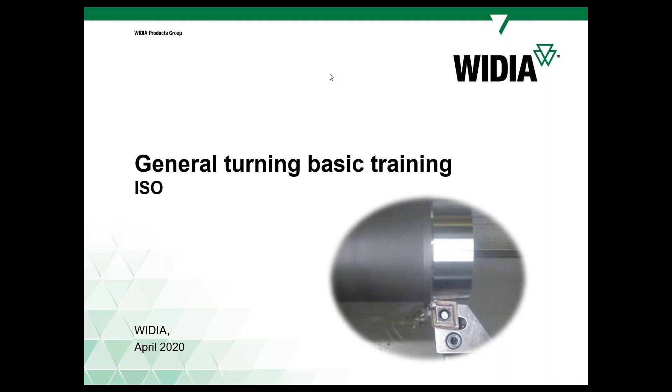Hello, dear metalworking colleagues. Let's talk together about turning applications. We have a slightly big presentation with videos about our assortment, and you might know that we have a slightly wide assortment for turning operations, for general turning, for cutting off, for parting and grooving, and also for threading, for everything that is generally needed. You can also find this information in our catalogs.

But today we will talk about this application, how it's done, and it's a more or less basic training, also with some tips. We will talk about definitions, about geometries, and not only today but also tomorrow. Today maybe we'll cover 50%, and the next day we will talk about cutting tool materials, workpiece materials, how to avoid wear, and so on - different additional topics related to turning tools.

So today we will talk about the concept of turning, comparison of turning and milling in implementation, and also about geometrical components of turning cutters, like cutting angles, and also related to inserts, cutting inserts, and about cutting forces. In the end, we will talk about cutting data and cutting parameters which influence the cutting process, or also the effectiveness of the cutting process.

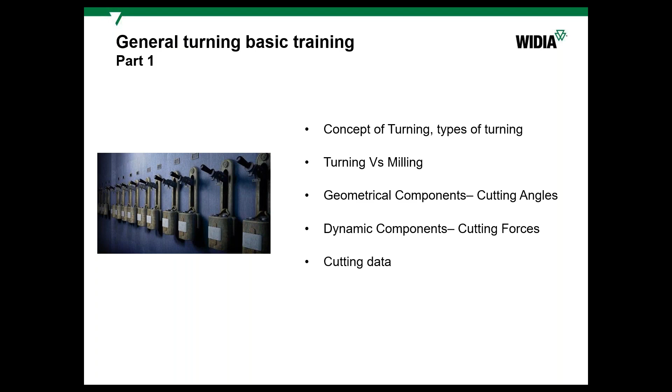So first, which types of turning operations can you face? They can be different. Today and tomorrow we'll talk about general turning, but a lot of things relate to other types of turning, like parting and grooving, threading, heavy duty turning, and other close-to-turning operations. Also, there can be different external and internal operations, depending on which side you want to machine the component from - outside or inside. So it can be external or internal general turning, external or internal parting and grooving, and threading also.

As for general turning, it can be facing - you'll see on the next slide, but let me briefly show it now. Facing is when you need to machine the face of the operation. Also longitudinal turning, which is just a linear turning operation, and also copying, when we need to machine a complex shape from a cylindrical workpiece. Also, there can be a trochoidal operation, when we use, for example, a round shape of insert and machine a sort of groove by trochoidal trajectory.

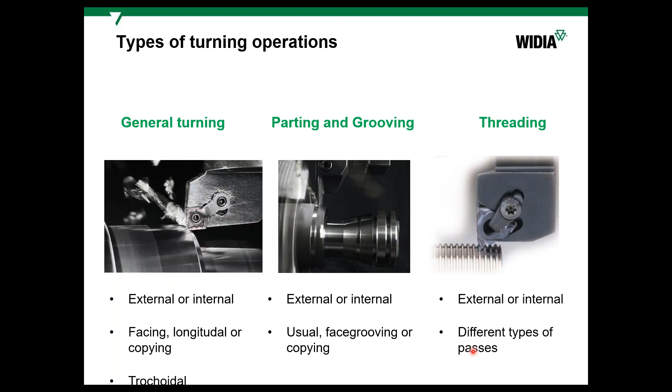So what is a turning process? Basically, it's a shaping process by metal cutting, where the workpiece, a cylindrical workpiece, is rotated by a machine tool or lathe. This operation was invented many years ago, and more or less modern versions are known.

They were developed in the beginning of the 19th century in Great Britain. Now we have more modern machines, where the workpiece is clamped in a chuck, the spindle is rotated, and the cutting tool comes up to the edge of the workpiece and moves in the direction of feed, depending on which side we need to machine: face, cylindrical, back, and so on.

So feed motion is done by the tool, which is clamped here - you can see an elementary holder. Cutting speed and the main cutting motion are generated by the spindle's rotation. So it's done like it will be shown now here.

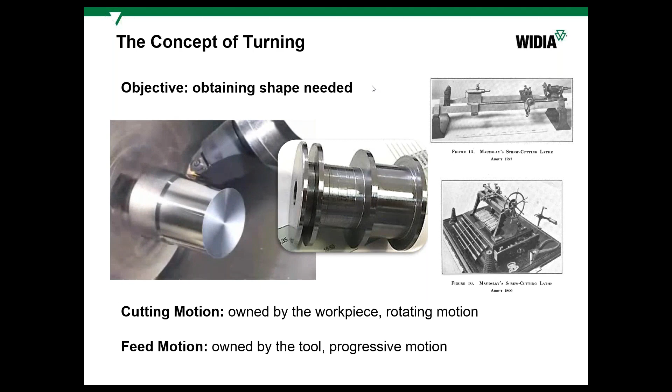There are also other types of operations for sure: tapping, milling, drilling, and so on. But the most popular ones are turning and milling.

What's the comparison? A milling cutter, in general, is like a turning cutter but with more teeth - not only more teeth, but it consists of many turning cutters, so many cutting edges. In milling, the main cutting motion is done by the milling cutter, the tool itself, while the workpiece, usually a prismatic or cubic shape, moves.

They're moving by the table of the milling machine, for example.

If we talk about turning, it can be continuous or interrupted, but usually, as you saw in the previous slide, the cutting edge is constantly in contact with the workpiece material, steel or cast iron or whatever. So in most cases, the cut is continuous - it's constantly cutting deep inside this material, this steel.

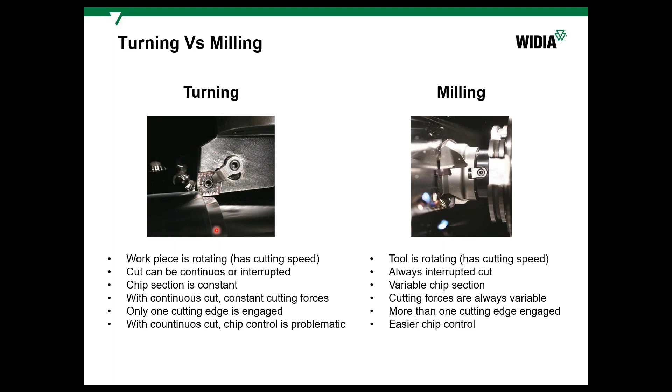It becomes an issue when we talk about deep slotting or pocketing, but not as often as in turning, where every time we need to think about chip control. If the chip is not divided and is not small, if it's long, it will rotate on the workpiece and can damage the tool and the surface, and you will get a non-ideal surface finish in the end, and reduced tool life.

So let's talk about cutting angles. For sure, you can open some catalogs or books, maybe you already studied this in university or college, but I'll just briefly explain it in a very easy way.

This is a turning holder. It consists of the holder itself, made of steel, which can be different shapes - prismatic or modular for external turning, or modular or cylindrical for internal turning operations. It also contains the cutting unit - the cutting insert basically - which does the cutting. The holder is needed to input this tool into the machine tool.

The turning holder can be different sizes, different cross sections, depending on the size of the workpiece we need to machine and the size of the machine tool. Also, it's connected to other things.

It has inserts on this cutter, or cutter in general. It has different cutting edges, main cutting edge and secondary cutting edge. Also, it has a rake face and clearance face.

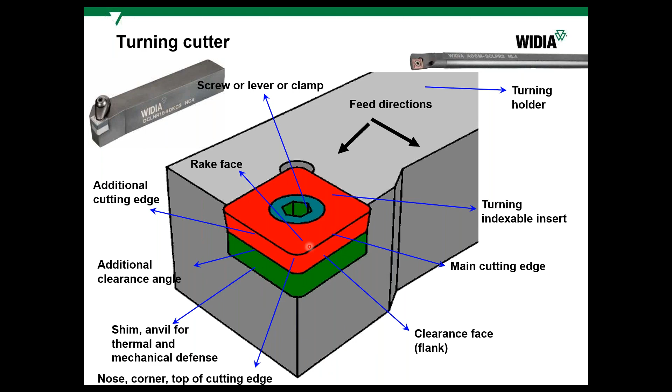As for holders, they can be different shapes, different sizes, from I don't know, 10 by 10 millimeters to 60 by 60 millimeters, if we talk about prismatic shape. They can also be modular, like KM, PSC, and so on. Cutting inserts can be different: one-sided, double-sided, smaller size and huge size for heavy-duty operations, for tube machining, and so on, with different shapes. They can be rhombic, sharp rhombic, round, square-shaped, and so on.

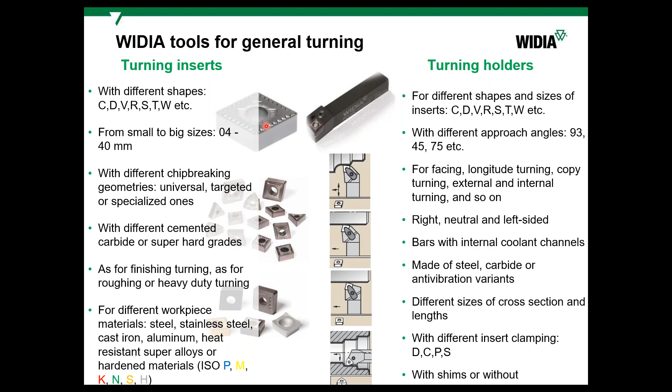These angles make the cutting edge itself sharp. Also, if they are bigger, they avoid having extra friction between the workpiece material - the clearance angle is responsible for that - and the cutting tool edge. So for sure, if we have bigger angles, it works lighter. It cuts very nicely, especially aluminum and soft steels.

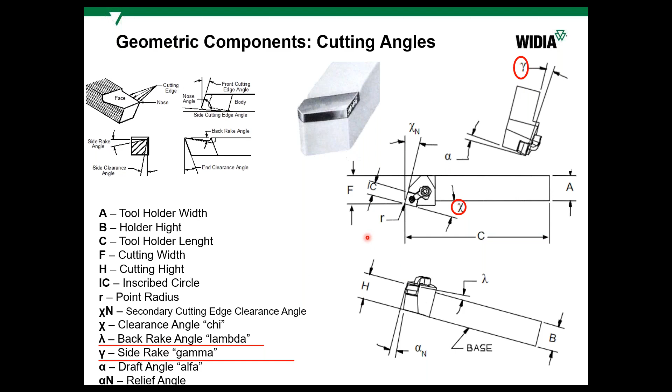If we look at the turning holder, the turning cutter from the top, in contact with the workpiece material, you can find two angles. I put here the abbreviation kappa. It's a lead angle and also a secondary lead angle. Why am I talking about these angles?

Not in detail, but I'm pointing out their value here, because we can operate them when we use the turning cutter. We can change the turning cutter to another geometry, and we can manipulate the lead angles too. So it can be 90 degrees or 75 degrees. Also, I'm talking about EMEA and Asia standards.

In the US, it's measured differently. It's the same angle, but it's measured from the vertical position, from a perpendicular line to the axis and the line of the cutting edge. In Europe, it's measured from the axis of the workpiece to the cutting edge line. So that's the lead angle.

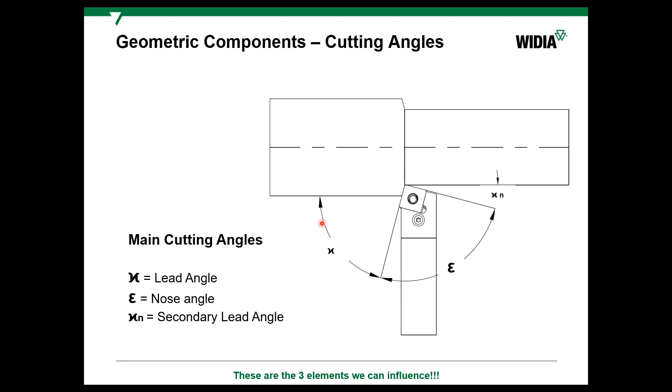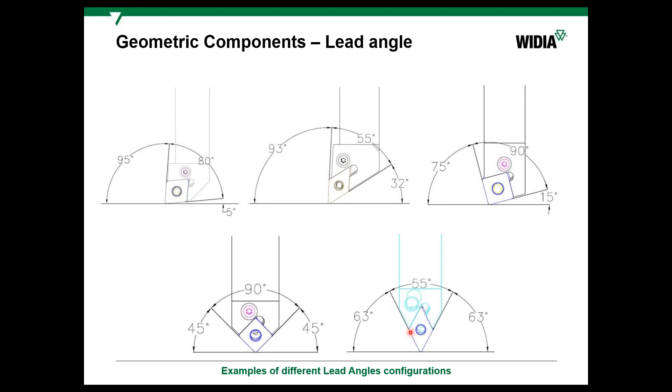They can be different, as I said, close to 90 degrees, close to 45 degrees. They can be 60 degrees and so on. So why is it important? First, it influences chip thickness.

When we talk about the cutting process, for example with the same geometry - meaning the same rake angle, clearance angle, chip breaking profile - we can have this on a rhombic insert and also on a square insert, for example, or a rhombic insert with this inclination in the holder. We can use the same feed, the same cutting data, but in the second variant, when the lead angle is 45 degrees, with the same feed, we will get a much smaller chip thickness.

So the load on the cutting edge will be smaller, but sometimes it can be critically smaller, and that's not desirable. It also influences chip control. Basically, when we get closer to 90 degrees, chip control is better. When we use the same chip breaker with a smaller lead angle, chip control suffers, so we sometimes need to increase feed to get optimal chip control.

We can also automatically increase the feed to get the same chip thickness, in order to put the cutting edge in the same conditions as in the laboratory, when this chip breaker for this insert was designed, to get maximum tool life and maximum results.

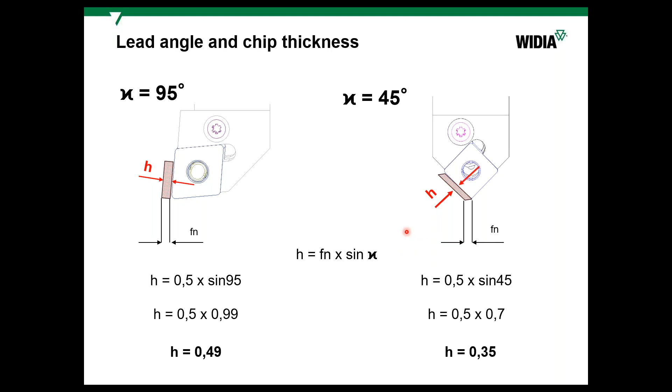In the catalog you will see it, you won't need to recalculate - it's already recalculated in the catalog tables and charts. Also, this lead angle, in other words, is called the approach angle. It influences the approach of the tool to the workpiece and its strength.

For example, when you approach the workpiece, the sharper corner will start to cut first. If it's an interrupted cut, not like here, but with some flats or severe skin, it will be critical and can lead to chipping and other types of wear we'll talk about tomorrow. So it's better to use tools with a smaller lead angle, so the corner doesn't start cutting first.

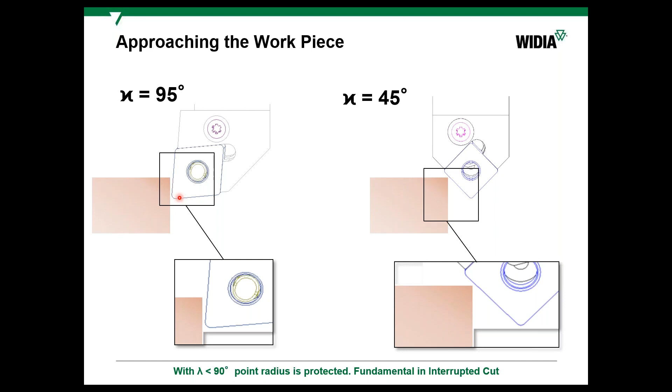The cutting edge, which usually is a little bit stronger - also in the chip breaking area, chip breakers are usually sharper at the nose and stronger along the cutting edge. The edge preparation has been increased a little bit there.

Also, the lead angle and secondary lead angle are important from a geometrical point of view. If you need to machine an interesting shape component, you need to understand, if you choose this tool with this geometry, it should be possible to pass through the whole way and not touch the workpiece material.

To achieve this, the secondary lead angle should be greater than the angle on the workpiece, on the component.

And it's also important to know, when you open the catalogs, we show in which direction this cutter with the insert can go. For example, here the cutter can go in horizontal direction, vertical, and also down, so it has clearance angles and rake angles almost everywhere.

But for example, here, you can see the arrow only pointing to the left, so it's possible to use it only for longitudinal turning, in the horizontal direction, not vertical. We didn't talk about this yet, but as a tool designer you need to understand that you also need to rotate, to incline the whole surface of the rake face, the bottom face in the holder - that's the inclination angle.

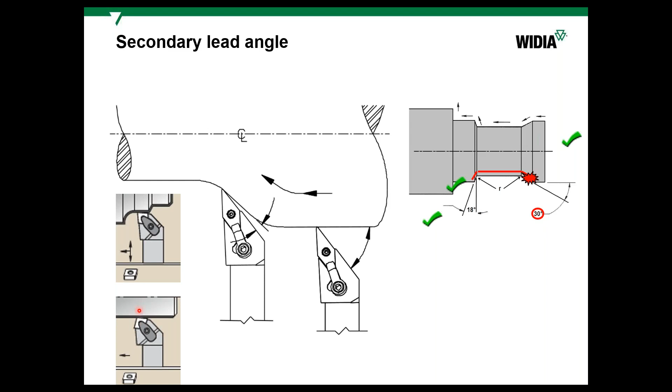And if we talk about inserts, they also have clearance angles and rake angles.

Also, if you open the catalogs, you can see the designation, the ISO designation system. It's international, more or less the same, and only in the United States it's different. So just sizes, the abbreviation is different, but different digits mean the same thing.

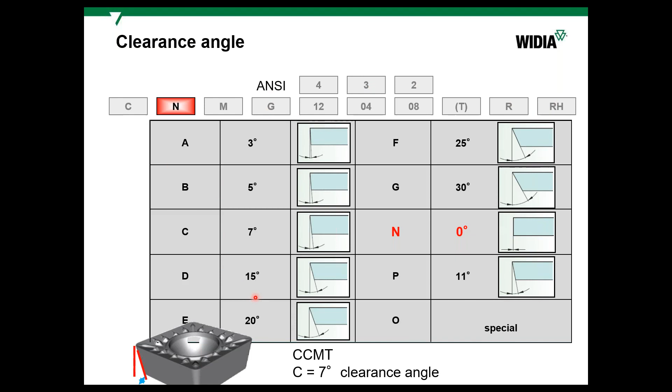So with imperial sizes, for example, length of cutting edge, or inscribed circle, also thickness, 4.76 if I remember well, but it's better to open the catalog to understand these dimensions: corner radius, edge honing, geometry name, double-sided or one-sided, and so on, and the shape for sure.

And the geometry of the tool is a combination of the geometry of the insert and the geometry of the holder. And for example, rake angle...

Why also? Because in the past, these inserts had a flat top, and we used special chip breakers which were clamped mechanically on top of the insert. We could change this chip breaker, bigger one or smaller one, depending on the depth of cut and feed we would use.

And this cutter with the flat geometry should also have cutting angles, and it has axial and radial rake angles and clearance angles.

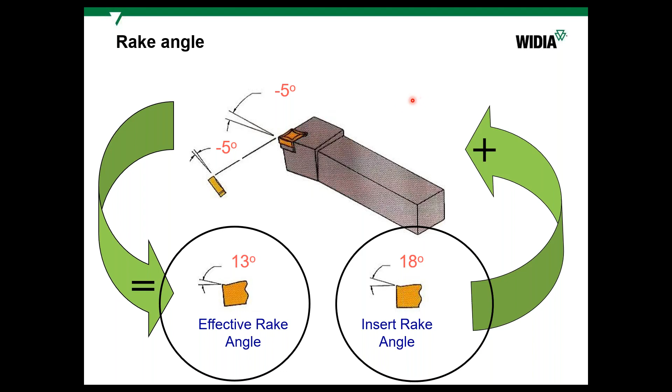So about these angles we talked a little bit. They're also called back rake or radial rake angle, and side rake, depending on from which side we look at the cross section of the cutting edge.

Basically, if we have bigger rake angles, it's very good to use such tools for soft materials and for light cutting - for cutting small stock, to remove small stock from the workpiece.

And so-called negative geometry - why negative? Its rake angle is minus, so it's not positive. That's why it's called negative, because in the past, inserts were flat, and the orientation of the rake surface was negative - I mean, the angle was negative.

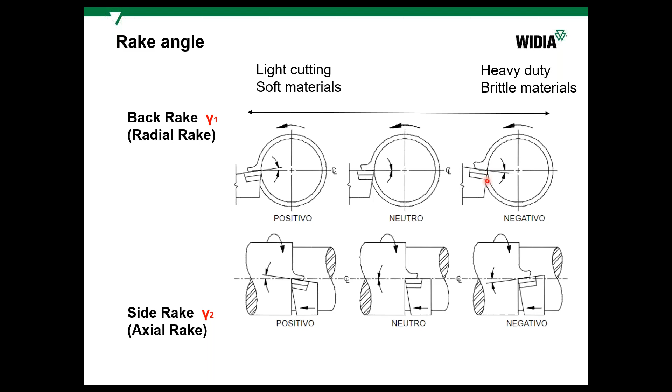That's why these inserts which I put here are called negative: usually if they have 90 degrees between the clearance surface and rake surface, you need to incline it somehow in order to have a clearance angle, because if you don't have clearance angle, there will be very big friction. So it should be inclined. That's why when we incline flat geometry, the rake angle goes from 0 to negative values.

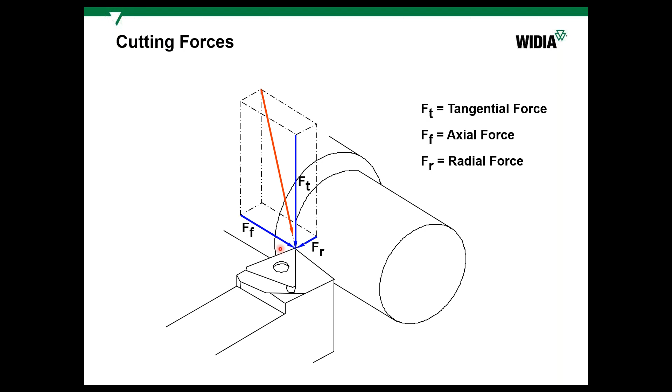Cutting forces: when we cut materials, there is a resulting cutting force, which is a combination of others - axial, radial, and tangential - and they influence the cutting process a lot. The main influence is the tangential cutting force, but the other cutting forces are also important.

How can we manage or influence the change of cutting forces, at least to change the main direction of cutting forces? For sure, with the lead angle again - so by changing geometry with different lead angles, we are changing the direction of the actual cutting force.

And I have a small question for you before I go to the next slide. Please take 1 minute, or maybe less, to vote for the right variant to this question.

What is the better choice for long shaft turning in your point of view? By long shaft turning, I mean a shaft or axle which has a diameter, with length about 10 times the diameter. You need to make external, longitudinal turning, decreasing the diameter with a tool with a 90-degree approach angle or lead angle, or a tool with 75 or 45 degrees, or a holder with a round insert. What type of lead angle, what type of holder with which lead angle, is the most correct in this case?

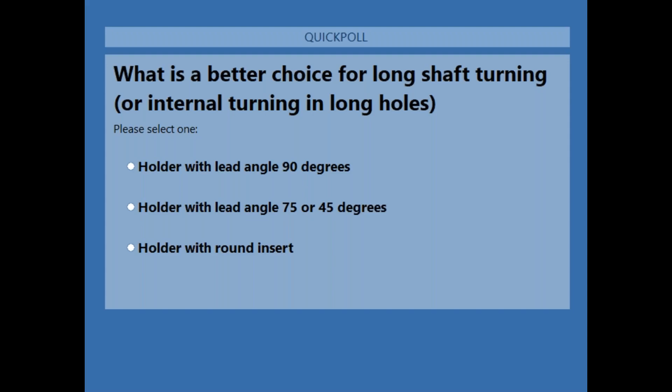Okay, thank you, I think we are ready to look at the results. So very nice results. More or less the same quantity voted for holder with a lead angle of 75 or 45 degrees, and also for 90 degrees, approximately a smaller but not that much smaller quantity of you voted for that. So let's talk about it a little bit.

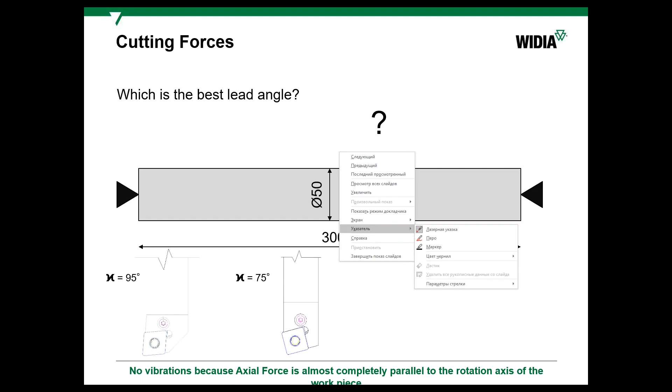Here it's a not rigid long shaft, which has some diameter and length. Here are two tools with 95 degrees approach angle, and approach angle can be 75 or 45 degrees. So usually, when you apply the first one, axial cutting force will always be perpendicular to the cutting edge line. One second, let me try to write it. So if you use it here, let's rotate it a little bit.

So there are different cutting forces. Here, one tangential is going, directed to the screen, and there are radial cutting forces. There are also cutting forces that are axial. So basically, axial cutting force goes perpendicular, and it's more or less good. For the cutter it's not that good, but the cutter is more or less rigid enough. It's not thin, it's slightly thick. So it's the normal direction for the cutting force.

But for the material, for the workpiece, it's not critical. I mean, here the radial cutting force is not that big.

But if you talk about 45 degrees, this combination will direct more force to the workpiece. If here it's not a problem, in the middle where the shaft is not rigid, it can bring additional vibrations. If this ratio is about 10 times, there will for sure be big vibrations if you apply this type of cutting tool.

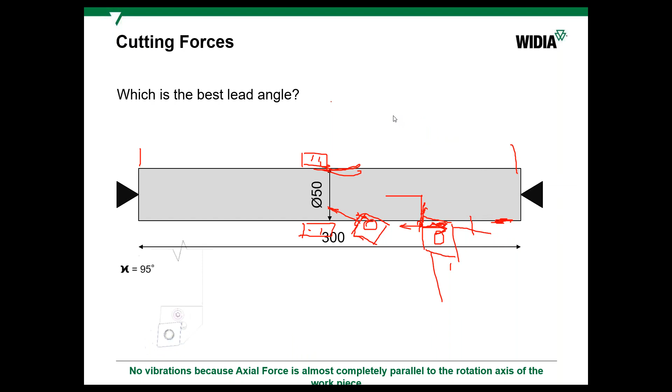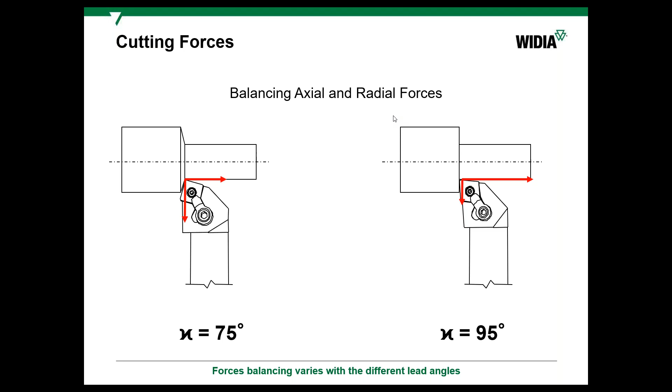So we need to balance the cutting forces using different combinations of inserts and holders. So think about lead angles, think about the component - is it thin, is it thick, is it rigid, and so on - and also about the tooling, I mean how it is clamped, both the workpiece and the tool.

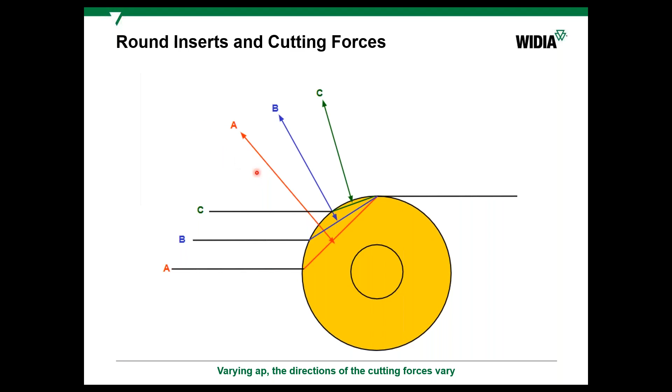So if you use round inserts, you will also face vibrations anyway, because at the maximal position with this AP max depth of cut, you will get about 45 degrees approach angle. It's not 90, so it's also slightly small, and the resulting cutting force will be directed to the workpiece again and will push it, generating vibrations.

The same can be said about the corner of any insert, not just round inserts. If you use it with a depth of cut smaller than the nose radius, you should also think about cutting forces - they will be directed more vertically than horizontally, and you can face micro vibrations and micro chipping, maybe even with light cutting.

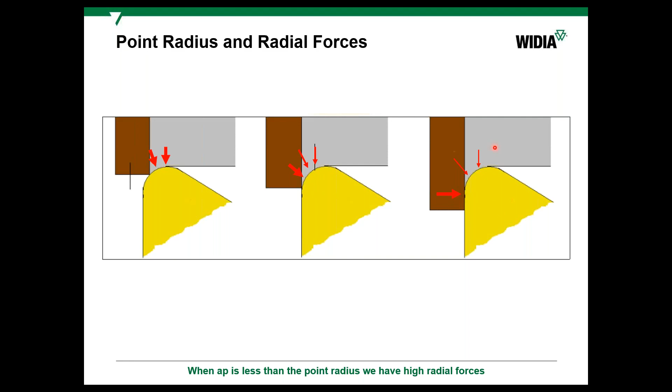That's why one of the recommendations for usage of turning tools is that AP, depth of cut per side, should be greater than the radius. So the third variant should be correct.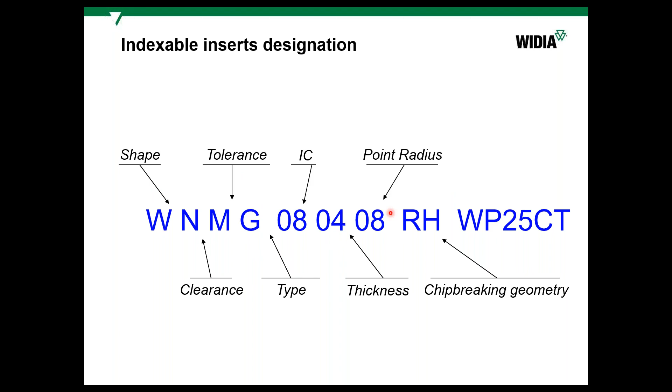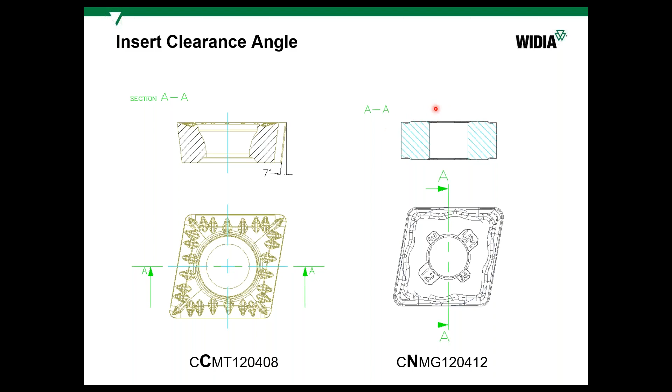So here, just reminding what influences what in the designation of inserts - it's very easy, and you can also look at it in the catalog. Inserts can be positive and negative. We talked about it a little bit, because inserts can be with clearance angle or without. If they are without, we need to incline them to get a negative rake angle on the tool. That's why they're called negative.

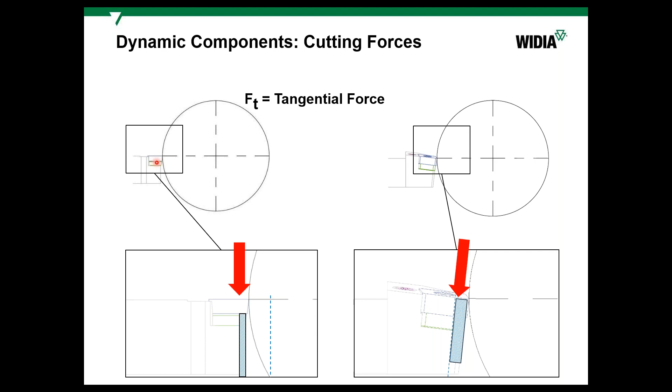So as you can see, positive inserts we should not incline. It's not necessary because it's geometrically shaped on the insert, and the rake angle can be 0, or if there's a normal chip breaker, it can be according to the rake angle on the insert, the same.

So let's talk about cutting data, and we will finish this webinar. I hope it's simple enough, maybe too simple for some of you, but we will also plan an advanced turning course, maybe a little bit later. So cutting data, which is related not only to turning but also to other metal cutting operations.

Cutting speed, velocity of cutting, so VC, and number of revolutions, diameter, feed per revolution, so F, feed, and revolutions. AP, depth of cut, Q, it's the chip volume, or in some literature you can see the short abbreviation MRR. Feed rate or speed of feed, so velocity of feed, VF. Chip thickness, we already talked about that, and spindle power and specific cutting force.

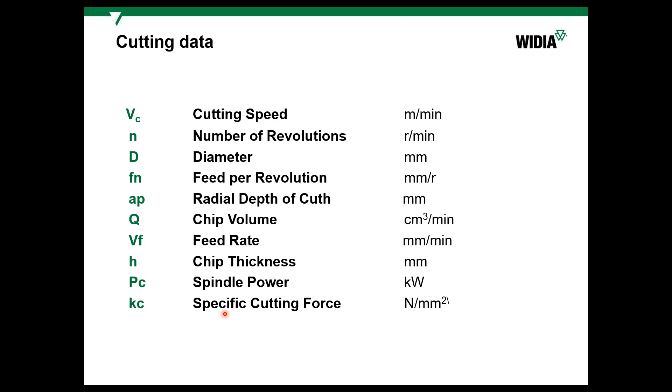Specific cutting force, it's a related coefficient to every material. We'll talk about it tomorrow. So cutting data: cutting speed, feed, and depth of cut.

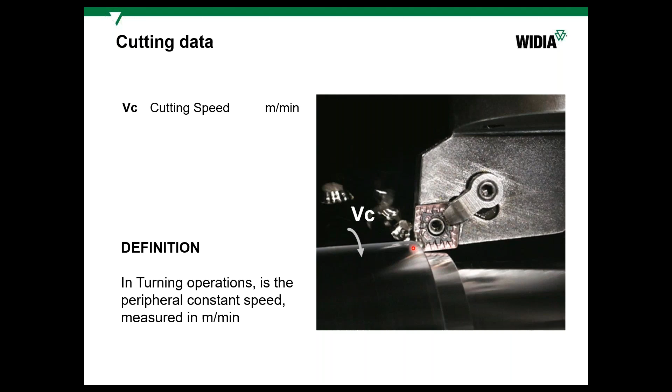Cutting speed in turning operations is a peripheral constant speed, or speed of the cutting edge on the diameter of the workpiece. So basically, to understand that, we need to look at the formula, and on the next slide, how it's been calculated also in addition. So cutting speed, it's a multiplication of pi by diameter by revolutions, number of revolutions per minute.

Basically, it's a peripheral speed or rotation speed of milling cutter or turning cutter. Also, you can recalculate back and calculate number of revolutions per minute, which you need to apply in the machine tool when you know the optimal cutting speed from the catalog of the cutting tool producer. So it's multiplying 1000 by cutting speed and dividing by pi and dividing by diameter.

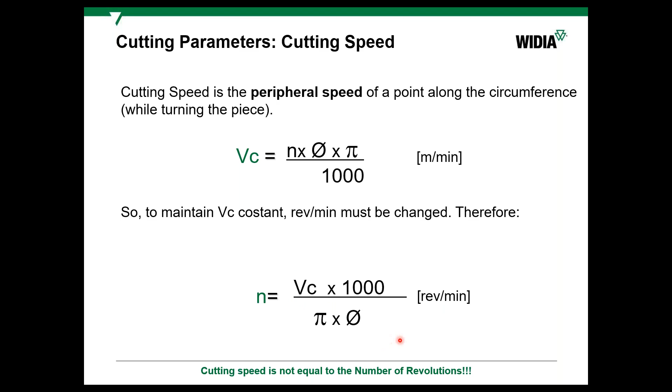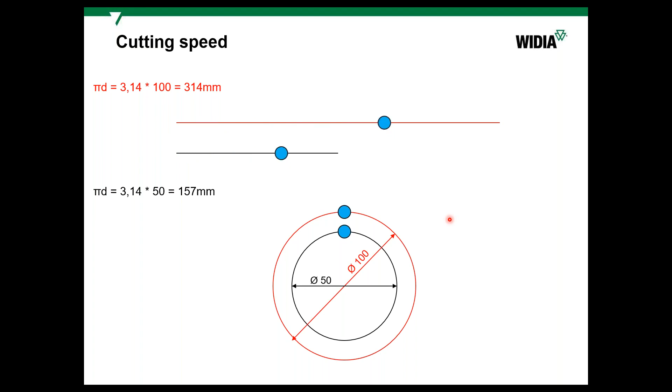So we need - and thanks God, in modern machine tool equipment, it's possible to maintain this in the CNC. So you can see here the length with, for example, different diameter, 100 and 50. It's almost 2 times smaller here than here. Here the difference can be just radially 25 millimeters, but here the difference is much bigger, and tool life correspondingly will be different.

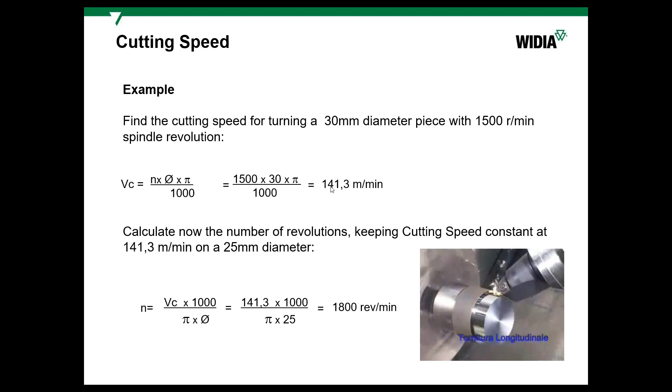Also, you can practice calculating it by yourself. Usually here, for example, for a facing operation, we need to compensate. You could hear it, maybe, I hope - when we go into the center, rotations are increased correspondingly to maintain the cutting speed given by the catalog. And here, compensation is not needed. So according to this diameter, if the catalog recommends this cutting speed value, we should just maintain it.

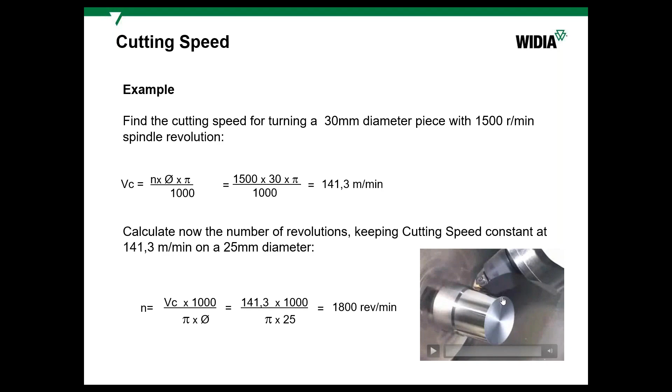Also, it's possible to maintain cutting speed depending on the diameter in CNC, in the G-codes. So usually it's G96, which allows you to maintain cutting speed at 200 meters per minute, within the range of these diameters. You can also put additional limitation of maximum and minimum revolutions, just if you know the capability of your machine tool. Or you can maintain a number of revolutions with the code G97.

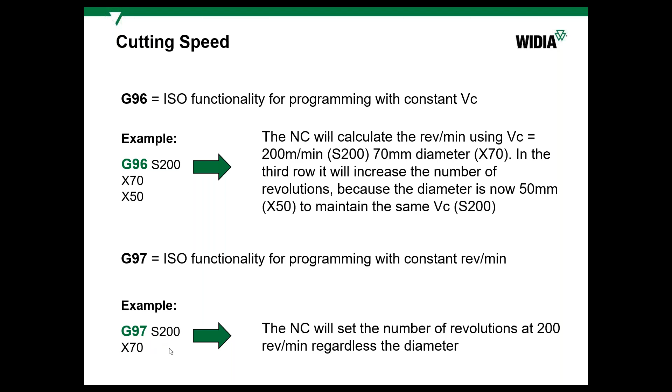Feed, it's a distance between 2 positions of the cutter during one rotation. So here it begins and here it finishes. One rotation passed, and you can see you will cut this length of the material, which equals FN. So FN is feed per revolution.

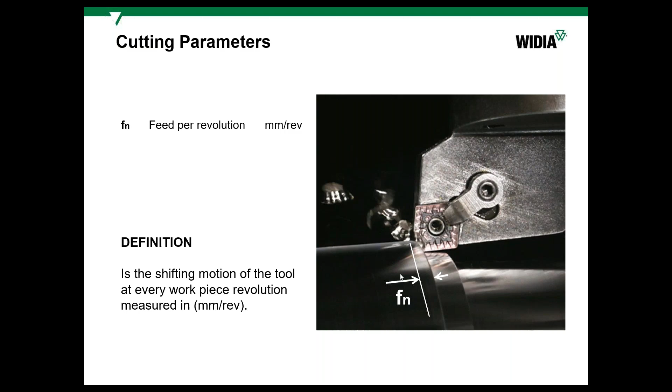It's also determines chip thickness. If you take a chip, you can measure it manually and understand - if you know approximately the approach angle - you can measure the thickness of the chip and understand which feed was used. And also you can measure the length, and understand which AP max was used.

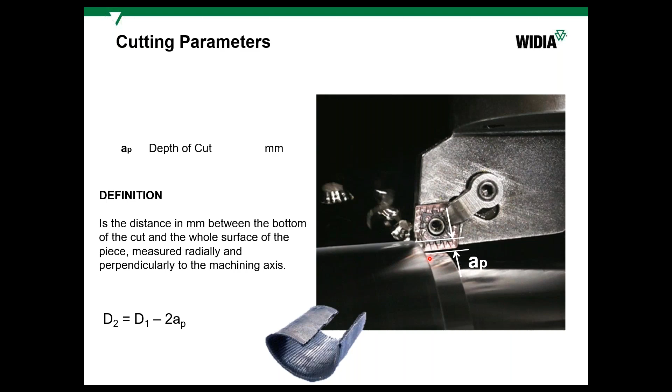And the AP, or depth of cut, it's a distance - basically it's the height of the stock being removed per one pass. So it can be calculated with workpiece diameter minus diameter of desired shape, divided by 2.

And feed speed, speed of feed, VF - it can be calculated by multiplying feed per revolution by number of revolutions. So it is a distance per minute which has been passed by the cutter in the direction of feed, direction of cut.

And we came now to productivity. It's Q, which is multiplying AP by FN by VC - so depth of cut by feed per revolution by cutting speed. We'll get cubic centimeters per minute, so it's the volume of the stock which is removed per 1 minute. So with the same tool life, the tool which has a greater Q value is better - it's more productive.

And usually it's like a speed, you can calculate the time for component, divide length by VF. You can calculate the time here also. I had not shown this elementary formula, but it's obvious.

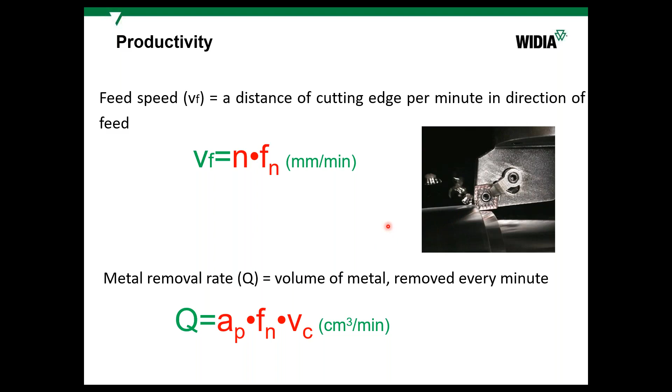Also, choosing the tool, we can influence the roughness, the surface finish. There are different formulas, but I showed a very simple one here. The formula maybe not that simple, but this chart is more or less understandable. It depends on the corner radius and the feed per revolution.

For example, here the next position of this cutter in one revolution will be here, and this height of the metal here is not even. The height will be approximately equal to the roughness, to the quality of the surface we get as a result. So depending on the corner radius and the feed, you can find that increasing the feed, we will get a rougher surface, not so brilliant.

But if you use the same shape of insert with a greater radius, not for example 0.4 but 1.6, with the same feed, this height will be smaller. So basically, if you increase the radius, roughness will be better.

But at the same time, you should remember what was said several slides ago: greater radius means a greater part of the cutting force directed to the workpiece. So with a bigger radius, there will be more affinity to get vibrations.

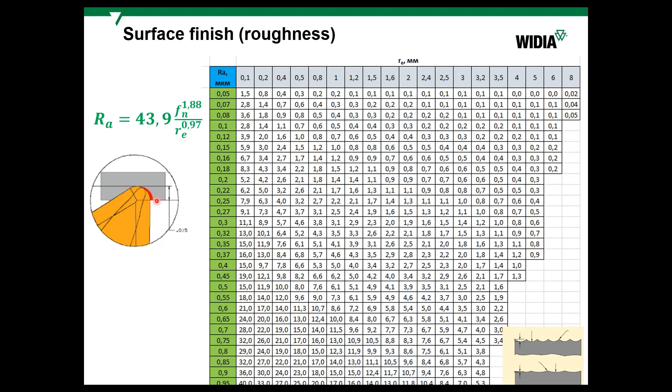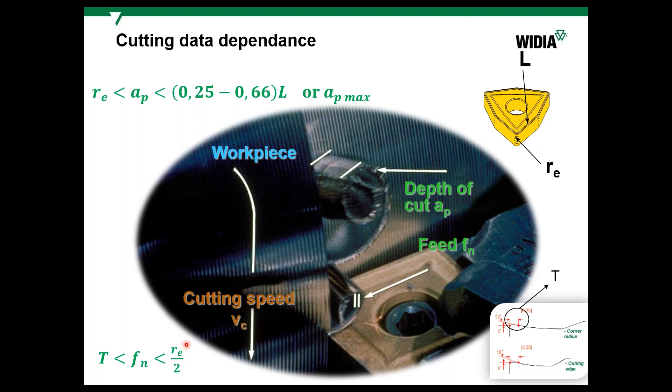It is because of this: if we get a very big feed, maybe it's good for the cutting edge, I mean it might be very strong with small rake angles, which is good. But if we have a feed greater than this value, the roughness will be very big. That's why this recommendation has been put here.

Also, according to this recommendation, if you have a depth of cut smaller than the corner radius, you will get not ideal chip breaking, because the chip breaker is designed better for the main cutting edge, not the corner.

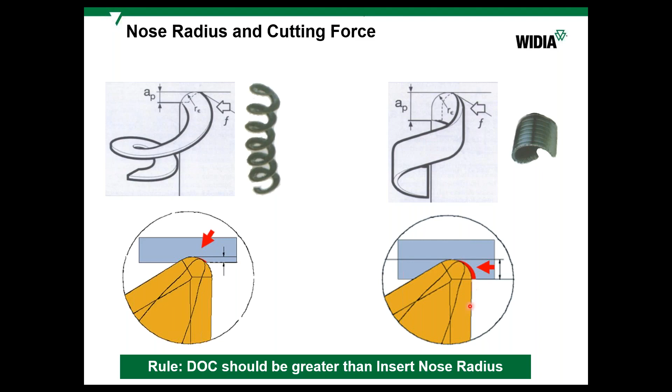For power, it's better to use a power calculator in our electronic catalog, which we call Novo. It has inside a database of specific cutting forces for every group of materials, steel, P1, P2, and so on, with coefficients of hardness and so on. It calculates the power a tool needs to be provided by the machine tool, finally, but very approximately.

If you don't have any electronics with you, I hope there will not be such a situation, it can be calculated slightly more easily: by dividing the cutting data by the coefficient 12 for stainless steel, 20 for steel, 25 for cast iron, and about 100 for aluminium. You'll get the kilowatts needed to be provided by the machine tool.

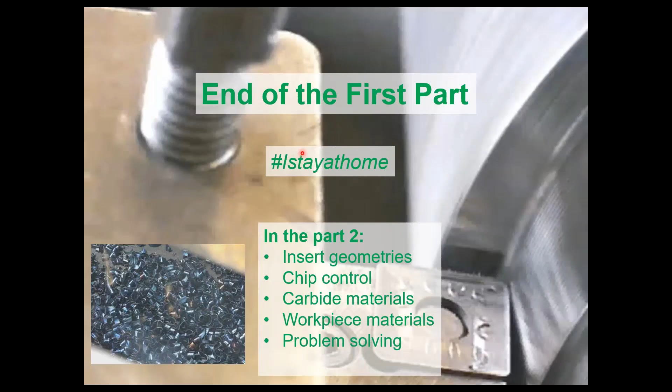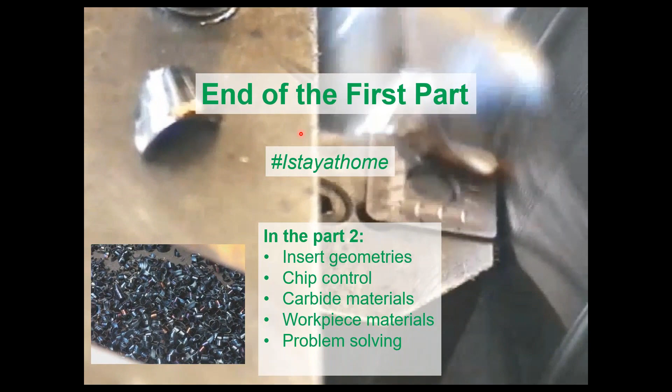So here, shortly, we finish the first part. Tomorrow we will continue with the second one, when we will touch on insert geometries, chip control, chip breakers, carbide materials, workpiece materials, problem-solving, types of wear, and how to avoid the wear we don't want.

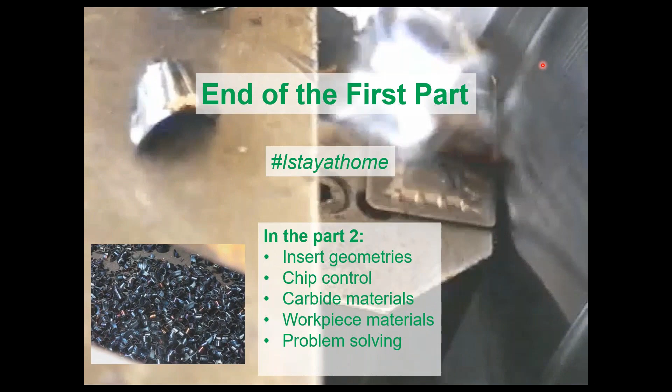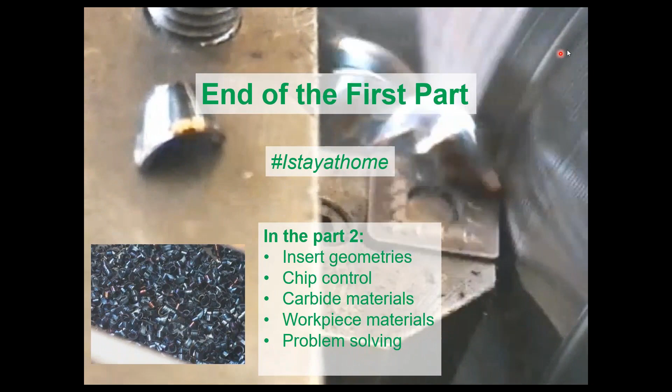Okay, fast. So please specify the parameters to be considered in turning of aluminum LM25.

Sorry, you were muted. So I just asked what parameter is interesting to know: cutting angles or cutting data? If cutting data, it's easy. The feed, depending on insert and insert size, can be around 0.2, for example 0.25, or for finishing 0.1 per revolution, and speed can be from 300 to 800 meters per minute, since aluminium can be cut very easily. But this grade of aluminium I'm not familiar with, maybe it's a special grade with a lot of silicon inside. I need to check the grade and get back to you by email, a little bit later.

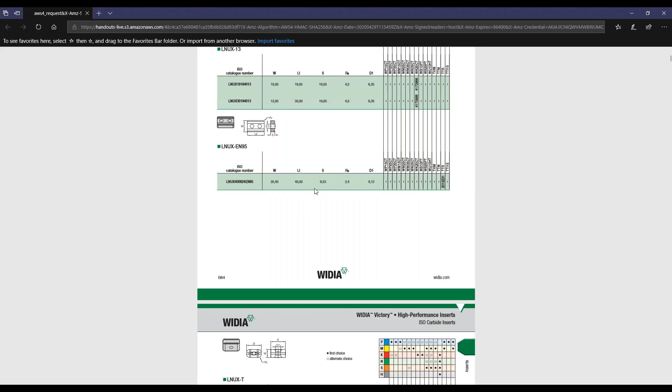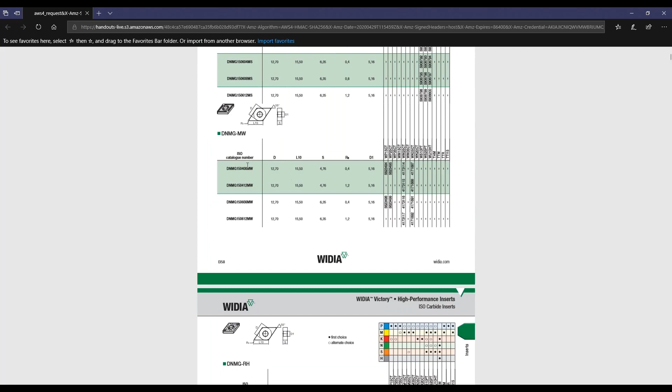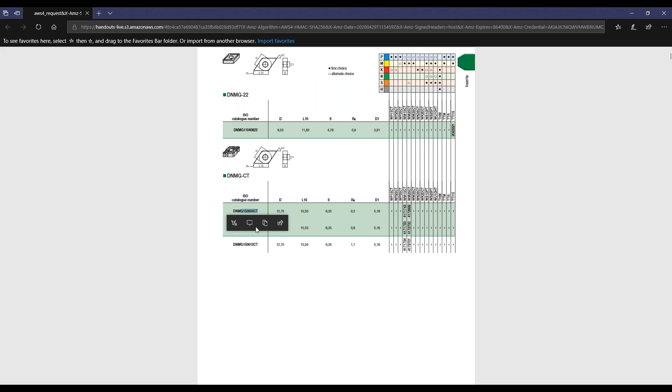I'll share the screen with our catalog now. So basically these are our insert sizes and shapes with different geometry. For example, DNMG inserts with a wiper cutting edge, and we have CT inserts. Let me try to magnify this. It's a very open cutting edge profile and chip breaker profile here. This insert can be used for back turning and for facing operations, where you need to machine a vertical shape without going from outside to inside the workpiece. It's possible to go down from here, and this additional chip breaker shapes very good chip, so it's not long. It's more or less the same technology which WIDIA introduced about 20 years ago.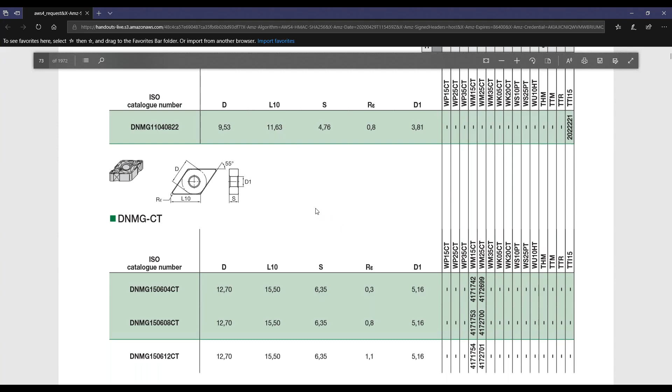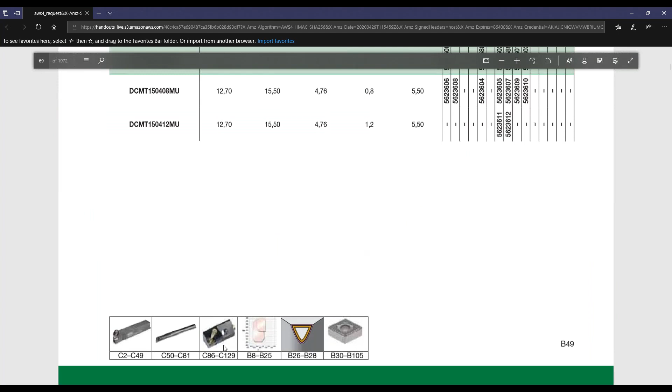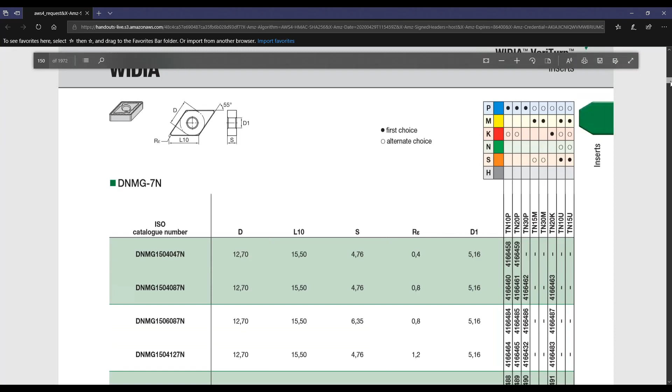Here's our catalog, the system is very similar. Here, for example, you can see on which pages there are holders, different holders, cartridges, cutting data, information about chip breakers, about grades, inserts, and also holders. Holders can be different, one second.

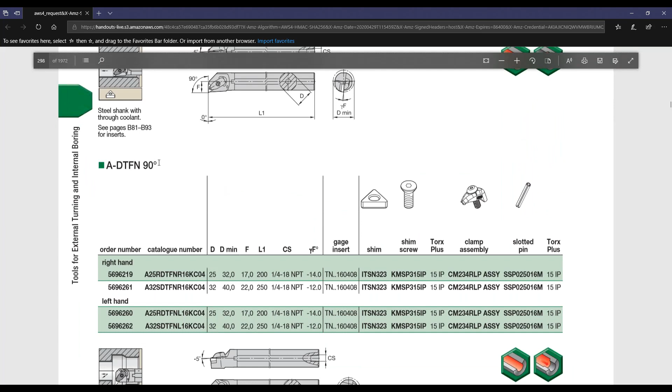Here's holders for internal turning with a 90-degree lead angle. Also the additional angles are shown - I mean the rake angles, axial and radial. It's in addition, for sure. Sometimes it helps, but it's better to look at the arrow to see which direction it can cut - the cutting holder with the insert.

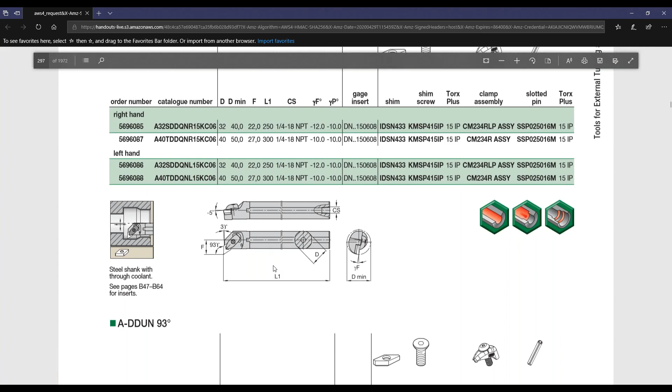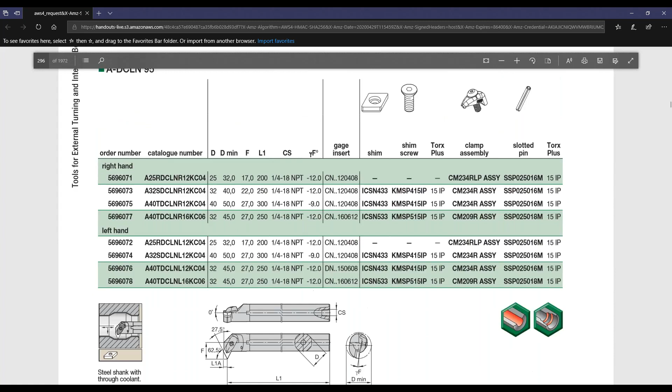And here the spare parts are also shown, and for which type of applications they can be used. Designation of holders and inserts is also in the insert chapter of this book. So if you have more questions...

How do you calculate the power and feed with respect to material hardness?

It's better to use our electronic catalog. I will try to open it now, because there is a place where we put a hardness, when we are choosing the workpiece material.

In this simple formula I showed earlier, it's hard to do exactly, so it's just plus minus 25% tolerance - a very easy to use formula. Basically, you need to decrease the cutting speed according to the difference from the average cutting hardness of steel.

For example, average is about 220 Brinell, and the hardness you have is, say, 350. So divide 350 by 220, and multiply this coefficient.

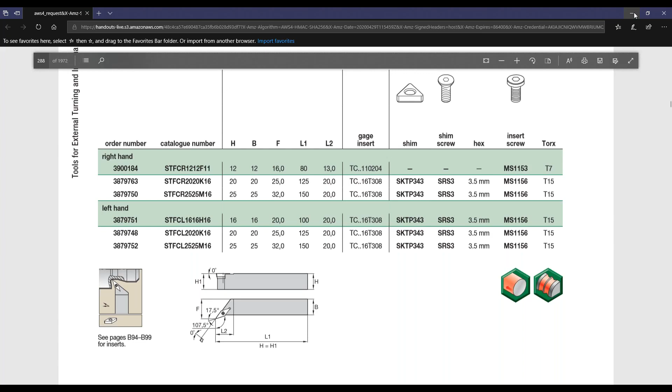One second, I will show the presentation again. Multiply this coefficient for steel or for cast iron - I mean dividing the hardness you have by the average hardness.

One second, I will try to check and find the cutting data. Maybe you can ask another question meanwhile.

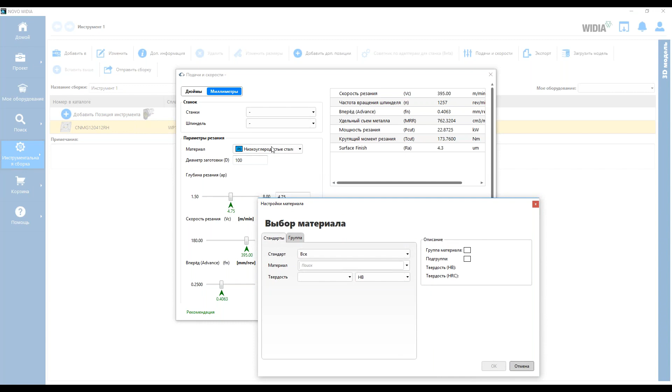Here I'm showing the electronic catalog - sorry, it's in another language, but anyway you can see the choice of material during the cutting data calculation. Here you can choose not only the group of material, but also the specific material according to the standard, and also change the hardness - put a higher hardness if needed, in Brinell - and it will be used for recalculation of power.

That's what I wanted to add.